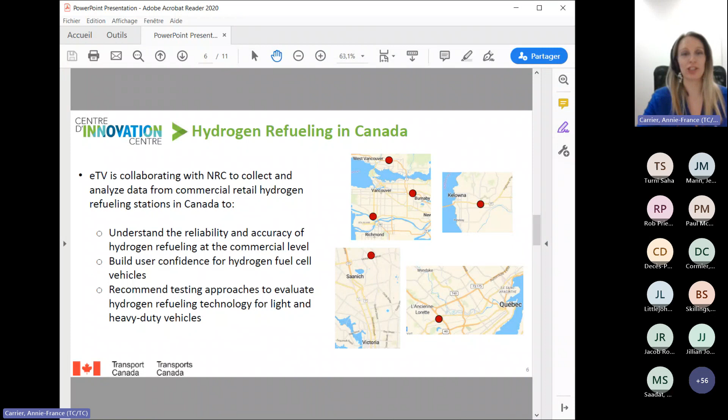The NRC will further elaborate on that during their presentation, so I will just keep it at that for now.

The federal government and the entire transportation sector have been quite active in integrating zero emission vehicles in order to reach its climate objectives. Up to now, however, most of the work has been focusing on light duty vehicles, but the need to expand to the heavy duty landscape is becoming prominent. That's why the interest in hydrogen is also growing.

If we look at the battery electric vehicle side, we have the American National Standards Institute and the Canadian Standards Association Group. They have both released roadmaps that have identified key research and standard gaps related to the deployment of EVs. There are many ongoing research efforts evaluating battery durability and real-world performance.

If you look at the hydrogen fuel cell vehicle side, the NRC has completed a gap analysis to obtain information from hydrogen suppliers and from industry, and also to promote alignment of standards development. There's a working group on hydrogen codes and standards and many research efforts on refueling.

Finally, if we look at zero emission vehicles in general, TC is participating in international working groups. TC is supporting codes and standards and infrastructure programming. We also want to better understand the hydrogen supply chain and the whole electric vehicle lifecycle.

Transport Canada also undergoes many activities related to hydrogen refueling. First, we have the decarbonization of the transportation sector, because hydrogen will play a key role. Some of the new stations to be built in BC will be for commercial heavy-duty vehicles, and TC is interested in expanding research to that area. We also support the development of hydrogen technology.

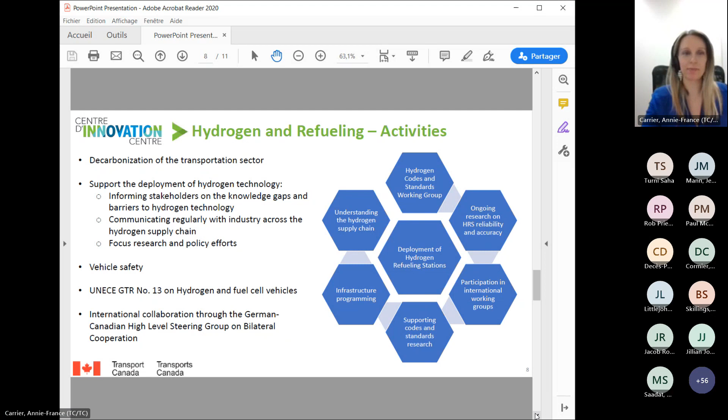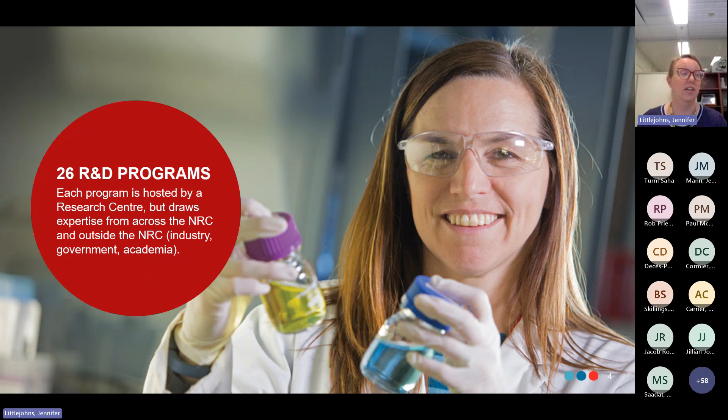So I'll get into the program now. One of these programs is the Advanced Clean Energy Program. This is the one that I'm responsible for. This program in particular has over 65 different projects where we partner very heavily to conduct R&D in the mid and high technology readiness level range for clean energy technology development.

The concept behind what we're doing here is to develop clean energy technologies that are not just for one end use application, but those that can be foundational for the up and midstream supply chains and enable multiple sectors to mitigate emissions and meet Government of Canada emission reduction targets for 2050. So this is providing the supply chains for clean energy technologies applicable to, for example, marine, aerospace, surface transportation, and even stationary power.

In this program, we have 4 different key focus areas. The first pillar is our battery energy storage pillar. We're looking at mineral processing, battery recycling, and materials discovery for batteries. The second pillar is the low carbon fuel switching pillar. Here we're conducting R&D in low carbon fuels production and utilization, such as biofuels and internal combustion engines, and how we can use our current infrastructure to reduce emissions more for the near term.

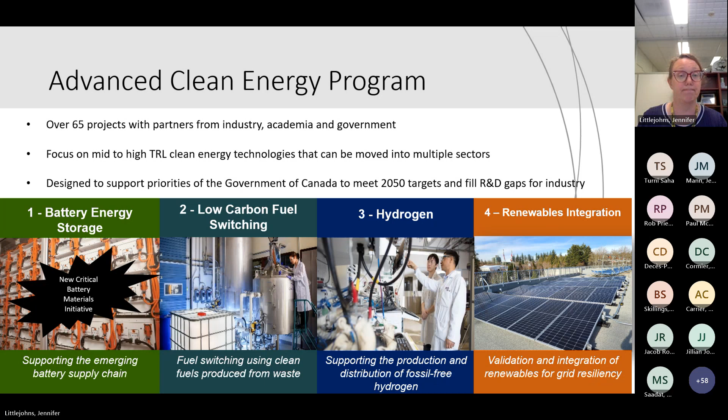So our pillar 3, our hydrogen pillar, is designed to support Canada's hydrogen strategy, particularly in the midterm to long-term goals. In particular, the hydrogen strategy for Canada states that hydrogen production must be reduced in cost as well as lowered in carbon intensity.

So we're focusing on production technologies that can do that. In addition, we're looking at distribution and storage infrastructure development, which are key aspects of the hydrogen strategy as well, so we're also working to support this area. As stated in the strategy, we really do need sustained R&D from the near term all the way to the long term to ensure that we can do the job. So that's what we're doing in this program, looking at those two areas and supporting policy through providing data and information as well.

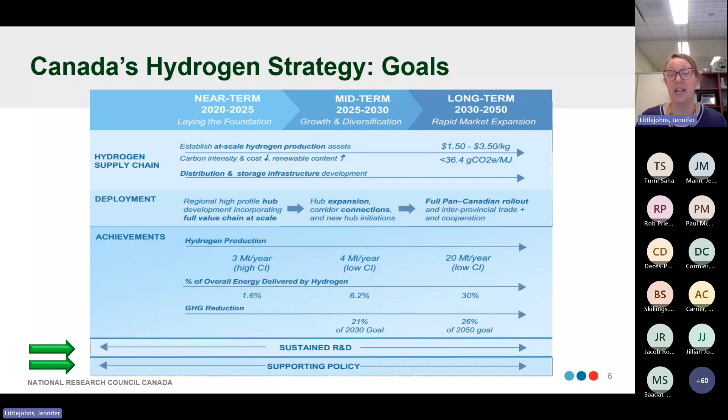This brings me to the focus of our hydrogen pillar. There are 4 areas that require focused R&D to enable the hydrogen economy. In the production area, one area we're investigating is the key requirements for membranes for water electrolysis, both for PEM, proton exchange membranes, as well as anion exchange membranes. We systematically investigate membrane defects, for example, in some of our production projects, as well as looking at testing platforms to really get the technologies validated.

To enable safe and efficient distribution of hydrogen, we're looking at codes and standards, as well as infrastructure requirements and/or failures for pipelines. And Cyril will talk about refueling stations as well, that's a really important component of this pillar. Finally, we're looking at developing decision-making tools, such as life cycle analysis for hydrogen production pathways, and gaps analysis for hydrogen codes and standards. That's all under this area of work.

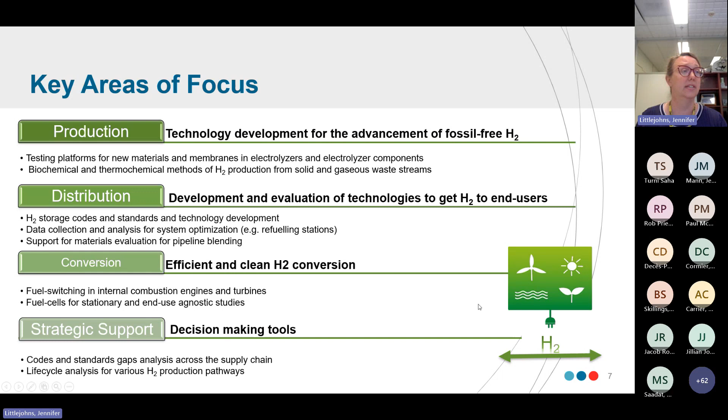And we do have really long-standing capabilities in R&D and hydrogen across the NRC. There are 4 sites in particular, in Ottawa, Vancouver, Montreal, and Mississauga, where we have a lot of capabilities applied to hydrogen. Everything from our low technology readiness level materials discovery for electrochemical hydrogen production, to much higher TRL for our testing platforms and materials testing for pipeline blending. Those facilities are located in Vancouver.

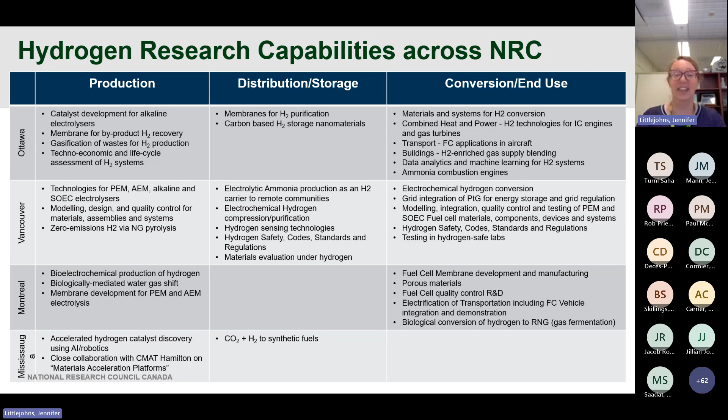Also in Vancouver, there's a really long history with the former Fuel Cell Institute. And then in Ottawa too, with our Aerospace Research Center, looking at hydrogen and turbines for power generation. So in short, there's a lot of different capabilities in hydrogen at the NRC that we draw from.

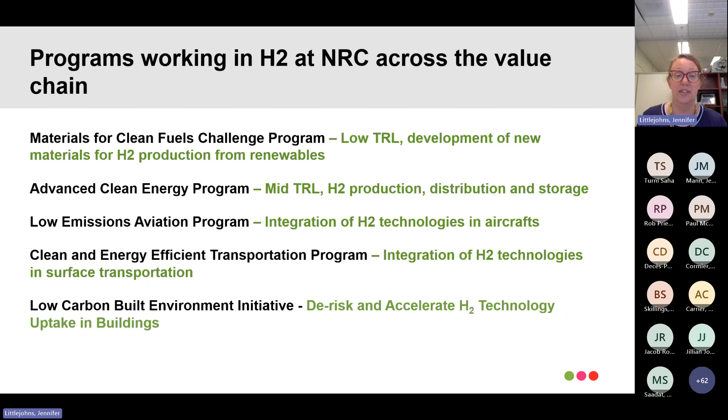It's not just the Advanced Clean Energy Program looking at this, but there are a lot of other programs across the value chain. I'm happy to put you in contact with leads for these programs if there's interest. For example, the Materials for Clean Fuels Challenge program is a highly collaborative program aimed at materials discovery. Our Low Emissions Aviation Program, or LEAP program, interested in hydrogen technologies as applied to aircraft. Our Clean and Energy Efficient Transportation program is interested in hydrogen as applied to surface transportation, for example fuel cells. So there are different key focus areas and different programs we work with.

Just a couple of example projects. I won't share Cyrille's project because he'll talk about that in more detail, but a couple of other projects I wanted to mention that could be of interest.

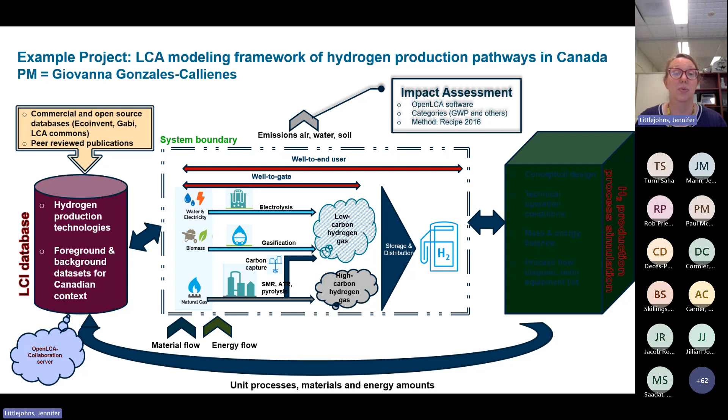One is the life cycle analysis of hydrogen production pathways in Canada, being led by Giovanna Gonzales-Callienes, who's giving a webinar next week on this—please join if interested. In short, hydrogen production in Canada is informally categorized by color associated with its production method, which leads to preconceptions regarding carbon intensity. But these preconceptions can be misleading, and carbon intensity should really be quantified using a standardized, transparent life cycle approach instead of color. This project aims to remove the color categorization of hydrogen and quantify carbon intensity using a life cycle analysis approach across various production pathways in Canada. We're working with several university and government partners, and the outcomes allow for decision making on investments and the best hydrogen production pathways to focus on in Canada.

Finally, another example project currently underway is our hydrogen codes and standards gaps analysis, led by Manuel Hernandez. It's a very interesting project looking at different hydrogen pathways across the supply chain—this is just one snapshot of the many pathways he's looking at. He's examining hydrogen codes and standards within different segments of the supply chain, diving in to see what codes and standards exist, where there are gaps, and who the key players and stakeholders are that need these standards. This project aims to point in the right direction toward the low-hanging fruit to tackle for codes and standards to enable the supply chain efficiently and effectively.

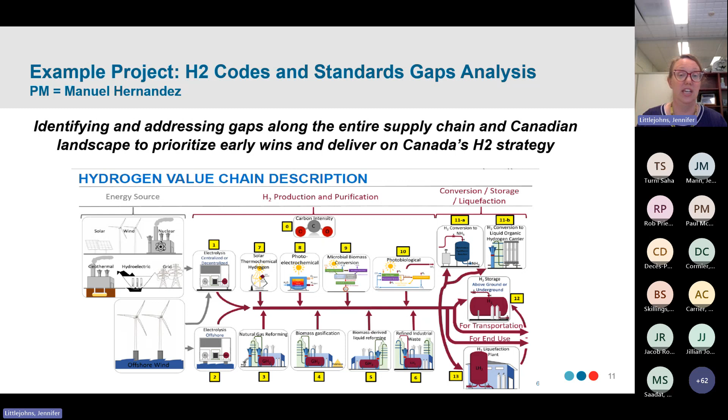So that's it from me. I hope I've given you a good overview of what we're doing in the Advanced Clean Energy Program, and please do reach out if you're interested. With that, I will hand it back over.

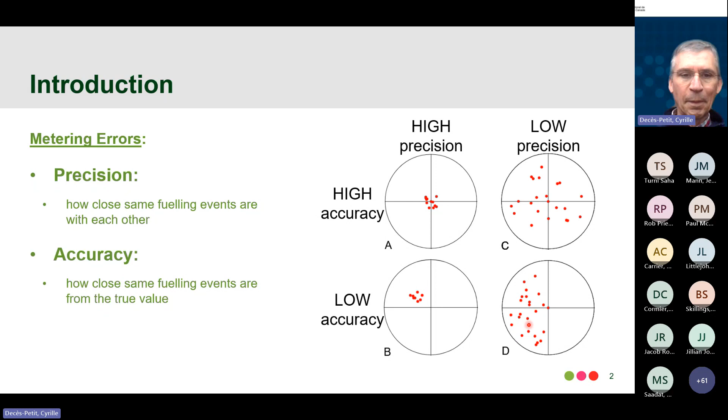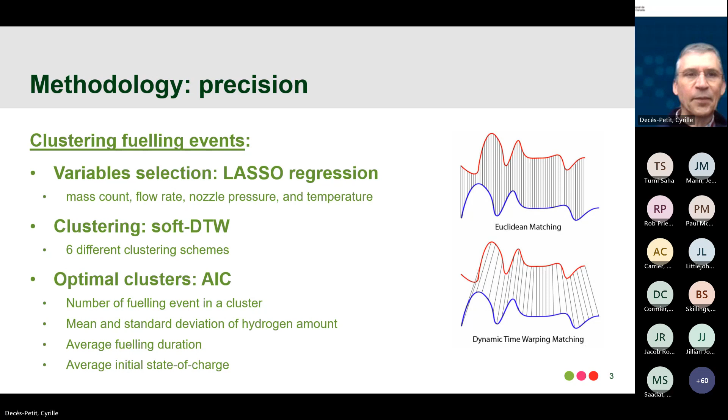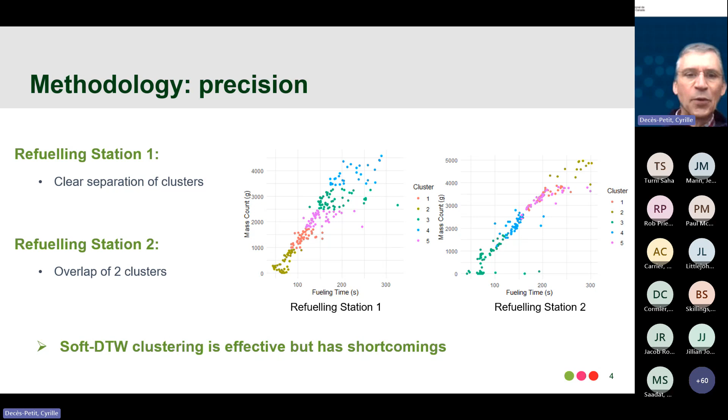So mainly, the results here should be taken in relation to each other, not as absolute values.

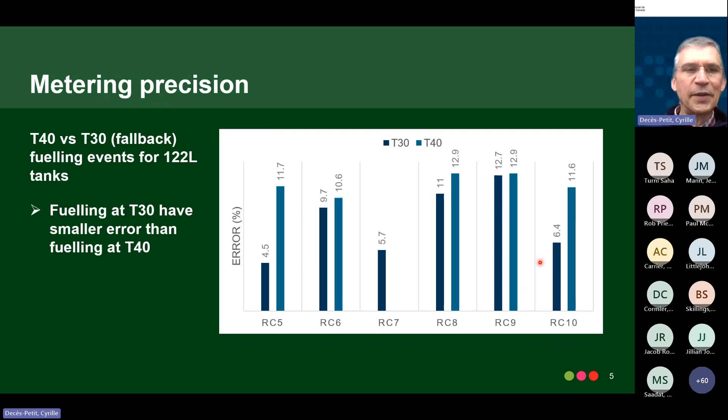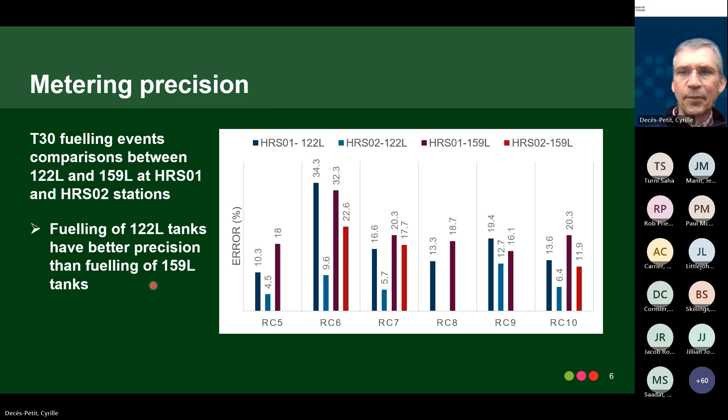Now I will introduce the methodologies that we use to evaluate the accuracy of the dispensing of hydrogen. We use, on one side, the pressure, volume, temperature method. As input, we use the vehicle tank volume, and the tank temperature and pressure at the end of the fueling event. This information is transmitted from the car to the fueling station at the time of fueling. The output is a hydrogen mass in the vehicle tank.

So there are some wild assumptions here. First, we assume that the temperature and pressure measurements in the vehicle tank are correct. The temperature in the vehicle tank is uniformly distributed. And the equation used to calculate the mass density of hydrogen is correct and valid for the temperature and pressure range in this operation. At the time of observation, the vehicle tank has reached a steady state thermodynamic condition. These assumptions are generally not met, but thermodynamic models remain the best option in our current situation.

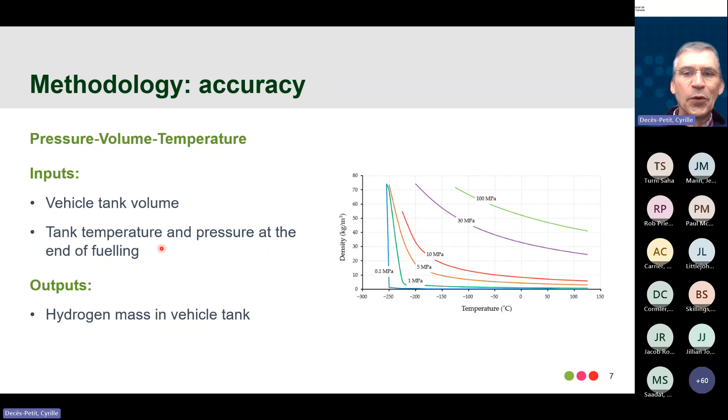It was observed that one station was overestimating the mass of hydrogen dispensed for 122 liters, while underestimating for 159 liters. There is another station that is underestimating for both types of cars, while the two other stations we reviewed were slightly overestimating the mass dispensed for both 122 liters and 159 liters.

And the achieved accuracy was 2.15% to 2.88%.

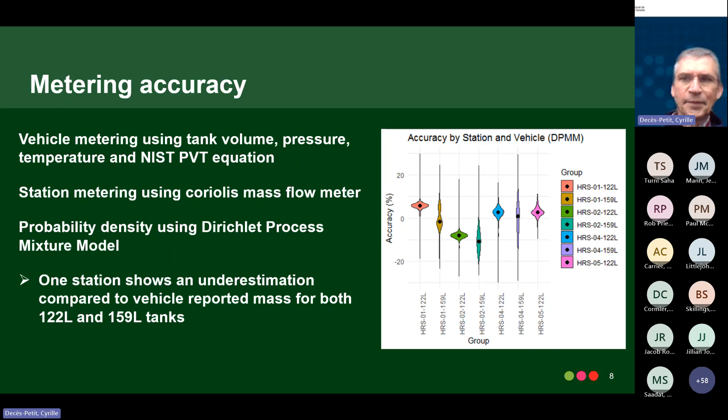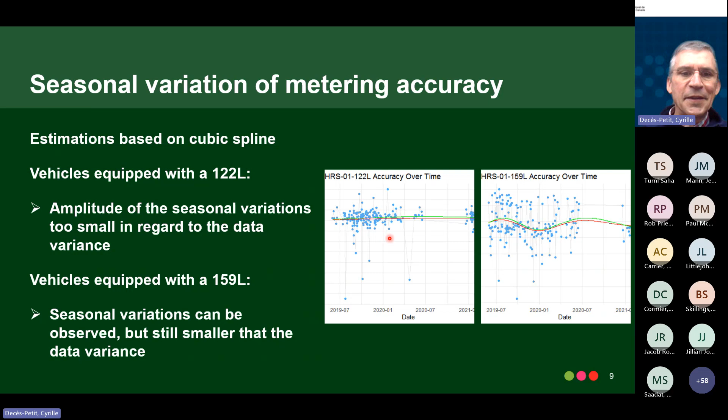On this, I will end my presentation, and I will pass on to Jeremy.

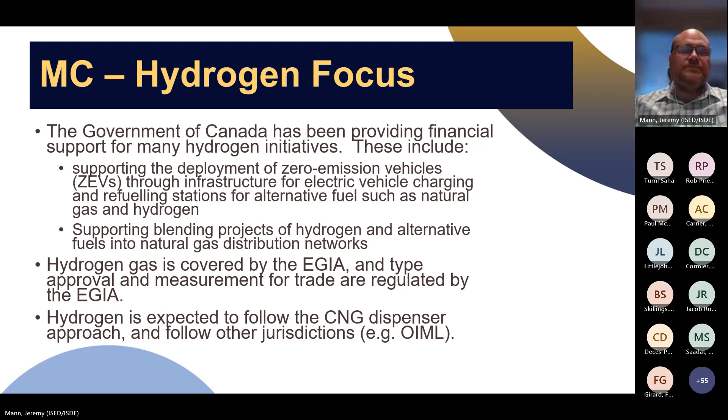One of the main issues with getting hydrogen dispensers approved has been the 3% limit of error. Regulation requires that all metering devices in use and operation need to meet a 3% limit of error under all in-service conditions, and a lot of the earlier hydrogen dispensers couldn't meet that.

The approach taken by all of the existing stations is some other form of sale to the public. If they use a non-measurement based approach, it doesn't get covered by our regulation - so flat rates, membership, pay by the minute, all of those that don't use a weight or a volume do not get covered, and so they're not currently approved under Measurement Canada acts and regulations.

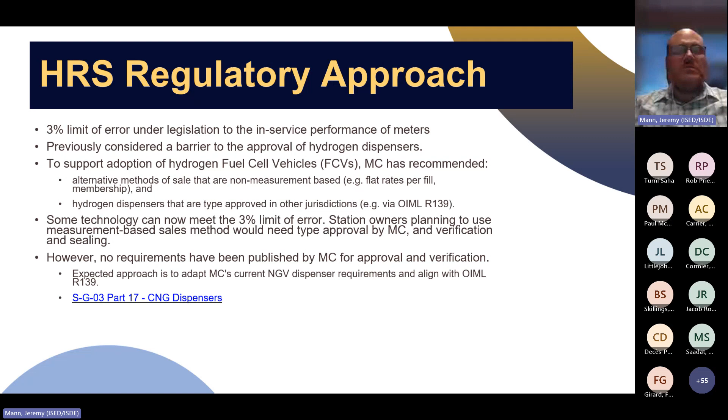I know from talking to industry representatives that a lot of the newer technologies are able to meet the 3% limit of error. We expect station owners to be applying, and we do expect to have approved equipment in the near term. We will have to update our regulations to meet those, and then we go through the type approval to have those dispensers type approved.

A second area that Measurement Canada has been involved in is blending of hydrogen into natural gas distribution networks. Last year we had a policy, G25, which was put in place to allow demonstration projects that distributors were wanting to run to go forward.

What it says is that all metering equipment previously approved for natural gas, if blending up to 5%, those projects can go forward. We'd like to be informed that those projects are going forward, but there's no restrictions on using that equipment that was previously approved.

At higher concentrations, between 5 and 10%, we are looking for either manufacturer's data or some other evidence to show that the equipment to be used can accurately measure hydrogen. Then at higher concentrations, 10% up to 20%, we expect a greater deal of work required, and we're expecting that either the manufacturers or the companies running these demonstration projects would apply for type approval and have approval of those meters to handle hydrogen in those distribution networks.

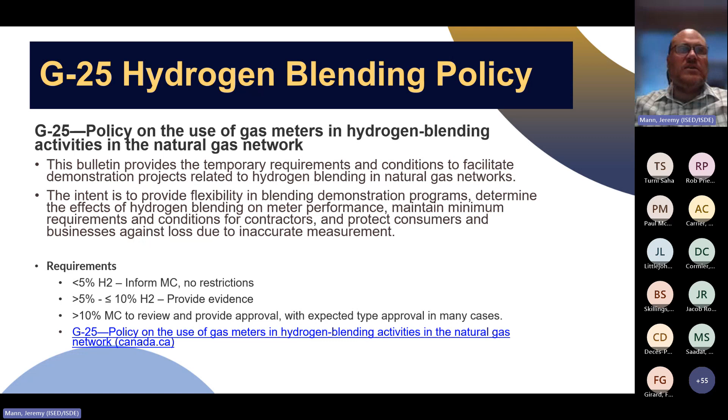So I've shared a link. If you're interested, you can read more about that policy.

I won't go into too much detail, but just wanted to say there's a fairly involved approach when a meter is submitted for type approval. We basically require it to go through a verification internally, have marking and sealing requirements in place, and have data generated through testing by us or a third party. Through all of that, we can confirm that device is type approved, and then it can be put in the field. From that point on, there's some ongoing verification requirements, but the first approach is to contact Measurement Canada if you've got a device that is not currently approved and you'd like approved for use.

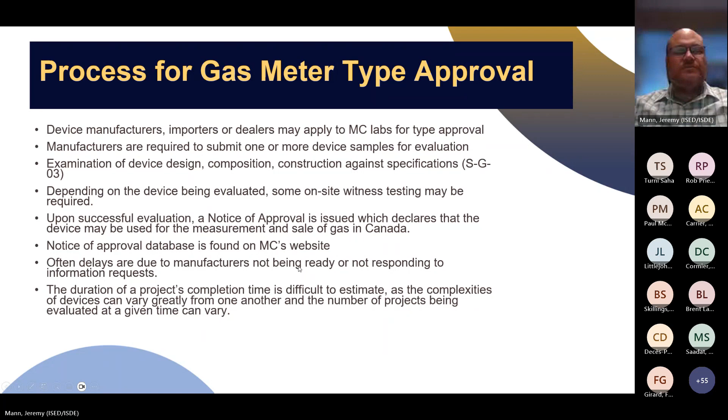Specific to hydrogen refueling stations, what we've been involved in is a lot of discussions with manufacturers of the equipment and the station owners or operators themselves, as well as international labs and international governments that are also involved in promoting hydrogen fueling stations.

There's a small number of stations. As I mentioned, they're not currently type approved because they're operating a different way of selling to the public. And there's a lot of stations planned over the next few years. The issue for approval becomes that a lot of them are heavy duty stations. I know the focus of today is on light duty, but I know there's a lot of work on heavy duty stations as well. And it becomes harder to verify the equipment for heavy duty stations because there's a lot higher volume of hydrogen that's dispensed to a vehicle.

One of the main things we're going to be working on, and we've been trying, is purchasing a testing rig to be able to verify type approval and also ongoing verification of the dispensers at stations. We've got requirements that we're trying to publish to have that purchased. One thing I wanted to mention is there are no plans right now to have that capacity for heavy duty stations or vehicles, but that's certainly something that's on the horizon in the future.

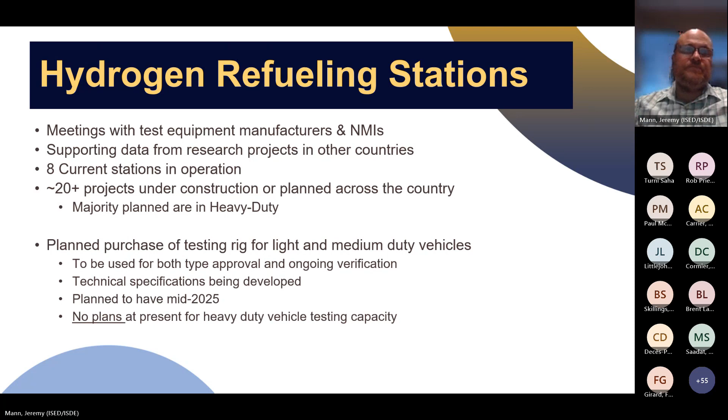So what's next? There's a great deal of work internally on updating our regulations to make sure that we can handle hydrogen dispensing and hydrogen blending in the networks. So that's a big part of our work. We are also updating our internal capacity by buying a hydrogen flow testing loop that'll be able to verify hydrogen meters for blending, and as I mentioned, trying to contract out to buy a testing rig for hydrogen dispensing stations. All of that requires ongoing discussion with manufacturers, operators, and industry representatives, as well as international partners. So there's a lot of work to do in this field, and we're digging through it.

It's interesting for sure.